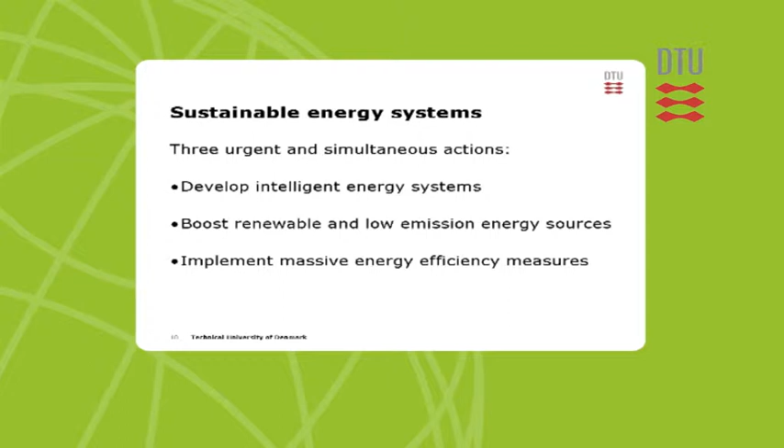Now, the first one, the sustainable energy system, can be done by having three urgent and simultaneous actions. First is to develop the intelligent energy system. That is required in order to take care of a massive amount of renewables, each of which has a different energy profile and supply profile, and also variable supply profiles.

The intelligence of the system is also necessary to harvest the massive potential of energy efficiency in transport and other end-use sectors like buildings. We need smart end-user technology, and in order to harvest the potential, we need a system which interacts two-way with this.

We have another section also concerning adaptation, where we need a new approach to how we manage and plan our society. We see three things to do.

First is to embark on getting reliable climate predictions. They are fundamental, they are a need if we really want to get more sophisticated and useful planning tools.

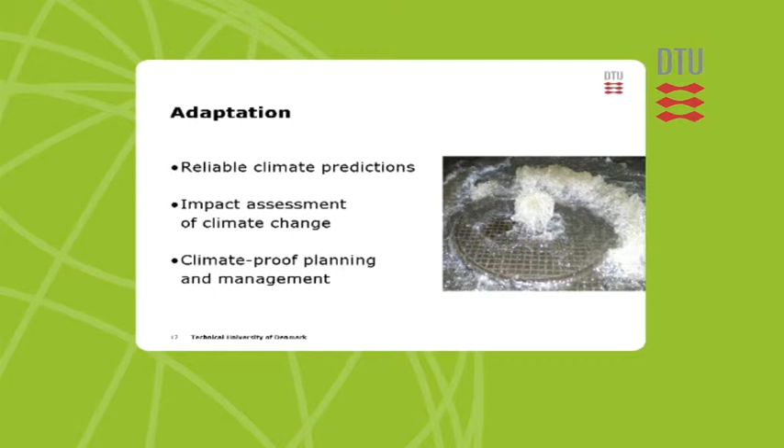Next is climate impact, to study how a changing climate itself, and also the growing population of the world, because climate change is one thing, population growth from 6 billion to 9 billion is another thing which needs to be taken into account. So how will climate changes and other demographic changes impact the natural carbon cycle of the Earth? And finally, develop some tools.

We have a section in the report dealing with what can we do to make this happen, and happen fast.

We give a number of recommendations, all devoted to being more efficient in our work. And our work, that is, of course, from a university point of view, but also from industry and public authorities. A key recommendation is that we need to be much more collaborative.

First of all, it's the same technology we're discussing all over the world, so global partnerships in aligning national research strategies is really something to opt for. Sharing large-scale facilities and sharing tasks in our technology innovation work. Partnerships between the three parties we have been mentioning here.

We often say that public authorities should take some decisions and get things moving, but they'll ask us what kind of decision. So we really need a much more rapid flow of information between these three parties to take informed decisions, not only in the public sector, but also at our level.

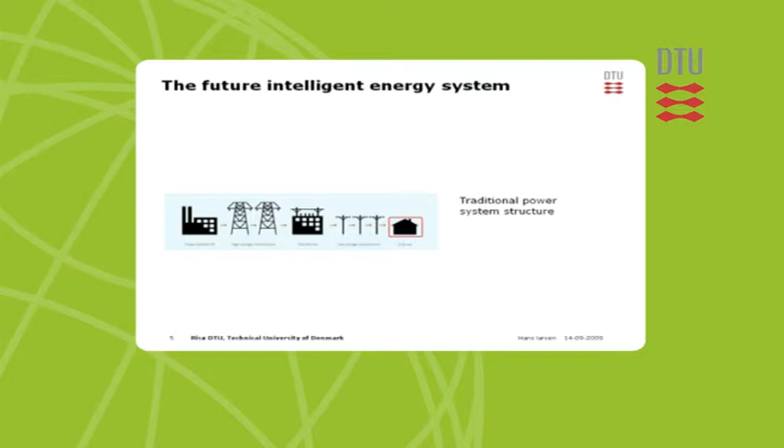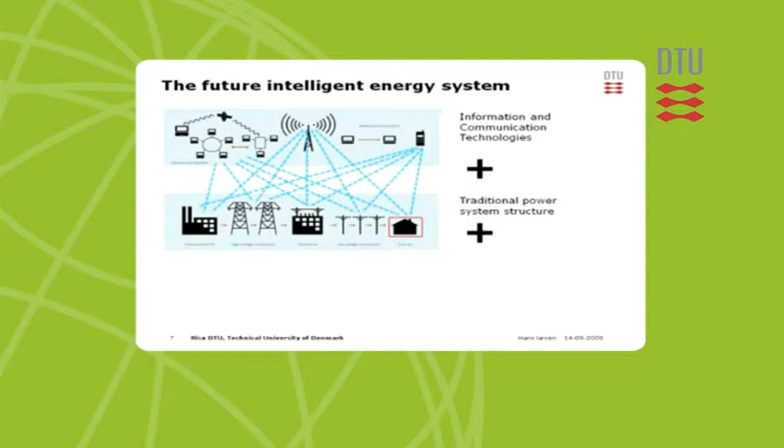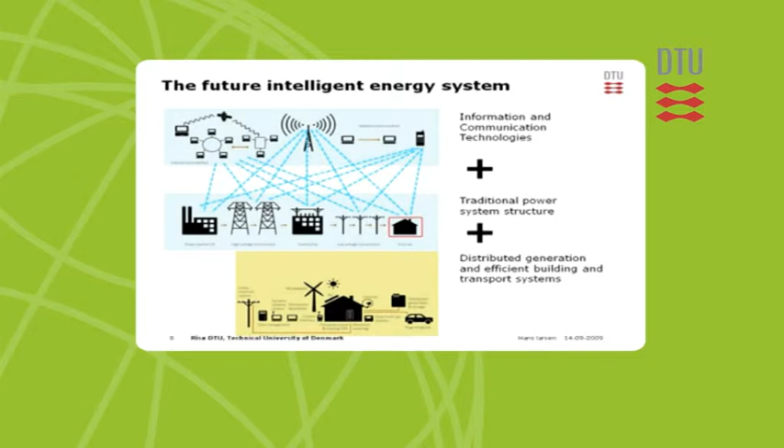What we expect is that in the new system we should make use of information technology and communication technology to a very large extent, and link this with the energy system, adding small local production units and end users in the form of buildings, transport sector, and so forth. If we combine all these things together, we get what we call the future intelligent energy system.

Not everybody knows that fluctuating energy means we need a new grid, because the existing one is a dumb one.

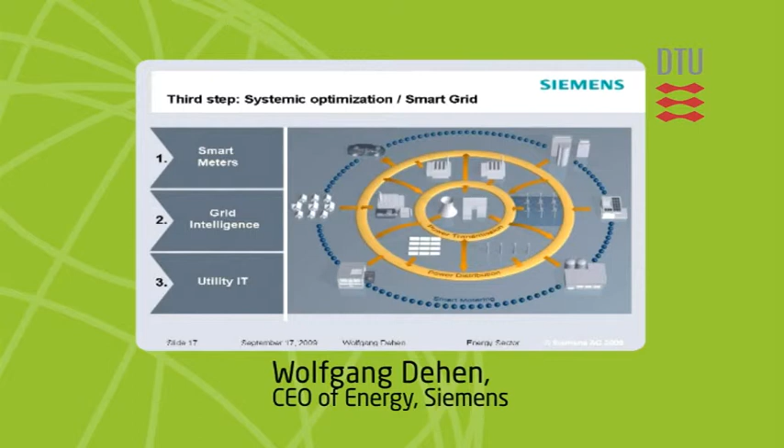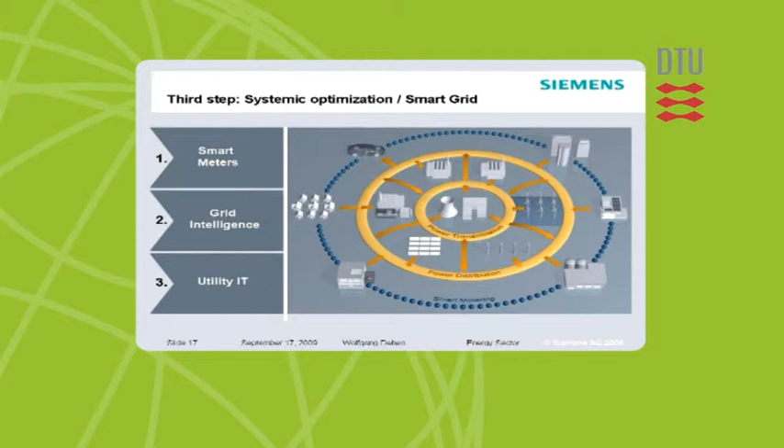What we need is intelligence on top of the existing hardware to make it two-directional and make it sensing and acting. For that you need smart meters, grid intelligence, and on top of it you need to connect the whole thing to the IT of the utilities, so they can really deliver what is expected: a better consumption behavior that really creates efficiency.

There are studies out in the world showing that if consumers know how much they consume in a given moment per day, and they change their behavior towards different consumption, there can be an efficiency improvement of 7%.

But of course, this doesn't work unless we can also deal with the pieces of the grid that will supply all this electricity to those of us who want to use it in a vehicle. You can imagine many more connections on the low voltage side of the grid.

We now need to be able to deal with the intermittencies at all kinds of timescales, from millisecond timescales to day-night to winter-summer. We need to move power over bigger distances, and we need to use sensors and active controls. Right now in the United States, at least, we manage the grid by turning power plants on and off. We need to do better than that.

The comment was already made that real-time measurement, communication, and control is an important part of this, and it needs to be robust and tolerant of failure. And this, at least in the United States, is going to require a totally different market from what we have now.

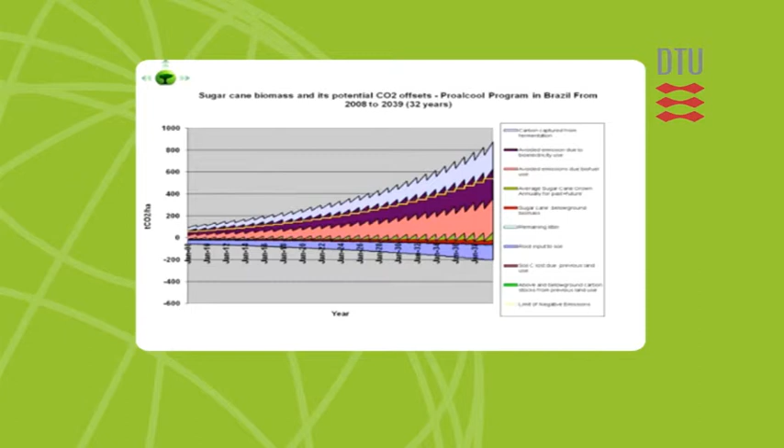We can generate a huge amount of electricity from the same feedstock. And then on top of that, the blue one, the bluish one, is carbon capture and storage. In reality, it's carbon storage, because this is carbon capture and storage from fermentation. And the yellow line that you see shows that if you are above that number, you are doing negative emission.

What we are hoping for, of course, is that the government would use pretty simple objectives so that it's known what does the Danish government, for example, want to achieve with its climate policy. We'd hope that it's as much as possible technology neutral, what it implements.

Of course, this cannot always be the case for timing reasons, for example, as I'll revert to in a little while. And then, of course, for us and other people, for us to invest in research, but much more importantly for our potential customers, to invest in facilities. They need to know that this is a long-term strategy by a government.

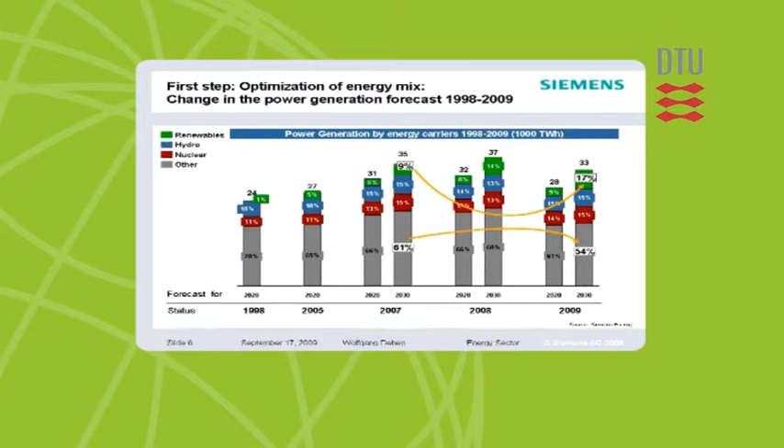The message is, when you look into forecast for, and we always use 2020 and 2030, and status, I think the message here is go to 2007, that column, and then compare 2007 and 2009, always to 2020 and 2030 numbers. You can see that there's a dramatic mix change.

And that, in my point of view, is reflecting, first of all, the target setting, but secondly also that people have realized that we need to move into renewable energy, and you also can see that a significant portion of fossil energy still will be there in 2030.

The general conference opinion was that the use of fossil fuels is needed during the transition period to become a carbon-neutral society.

Hence, the technology to capture and store CO2 needs to be further developed and deployed. This was addressed by several speakers.

The last part of my presentation deals with the carbon capture and storage part. Here, there's a real challenge in that you have to deal with simultaneous development, both of capture processes, transport processes for CO2, and also the storage processes. Different kinds of challenges, but they have to be met simultaneously.

So you have to be sure that there is a market for the processes after the development.

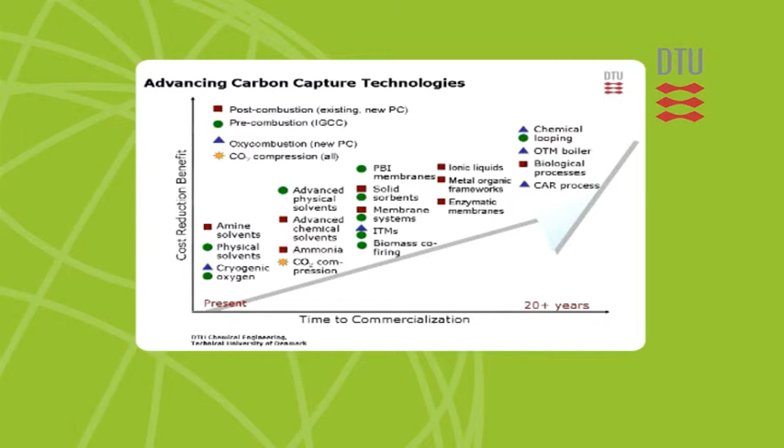For the capture processes, there exist a lot of technologies under development now, the first generation amine processes, and a lot of other processes under development. One of the challenges with the amine processes is that they happen at very low temperature and are very expensive energy-wise. If you can move the capture process and desorption process to a higher temperature level, you may have a much lower specific heat consumption, energy consumption.

Large-scale CCS demonstrations, to get from here to the commercial phase, you do need to have those demonstrations. The amount involved is greater than company balance sheets are likely to be able to justify, especially at a time of reduced liquidity. Only by doing the demonstrations are we going to make that final step from proven technology through to effective operation and unpack those issues around transport, storage, the business model, and so on.

Where policy did more than just say 20% targets, as with this technology thou shalt now produce electricity from coal differently. And that is, as John rightly pointed out, it's in the European Union, but also beyond this, that we should have demonstration plants. Now the European Union has decided, and that's very rare, that the Commission has gotten 5 billion euros, which is a lot of money for us, to do something about energy.

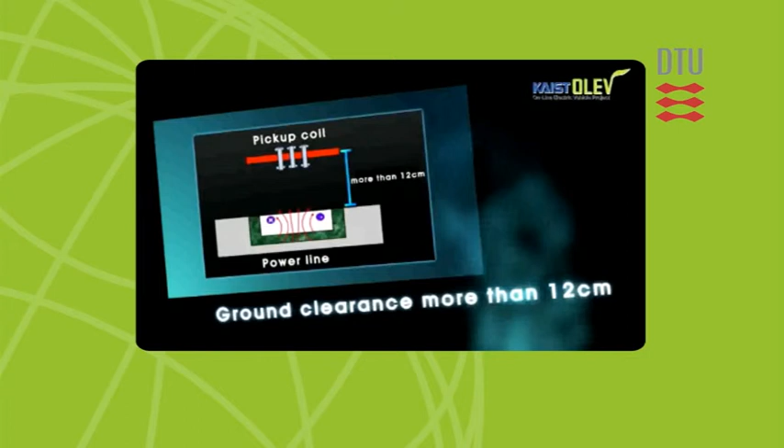Massive energy efficiency measures are a prerequisite to meet the growing energy demand, and to develop a sustainable energy system. The potential, especially within the transport sector, was illustrated.

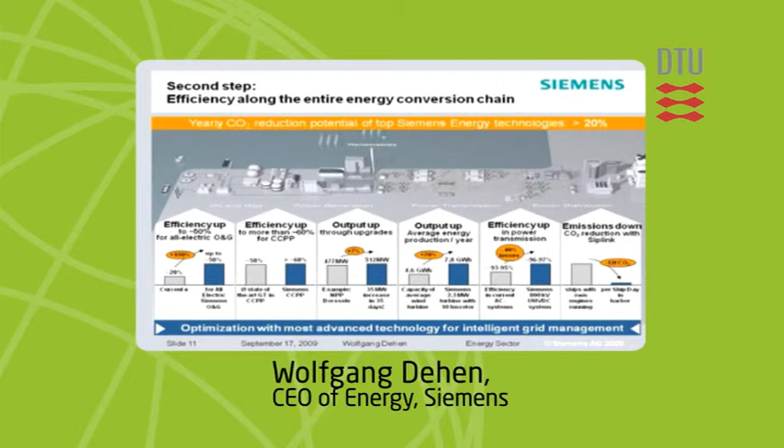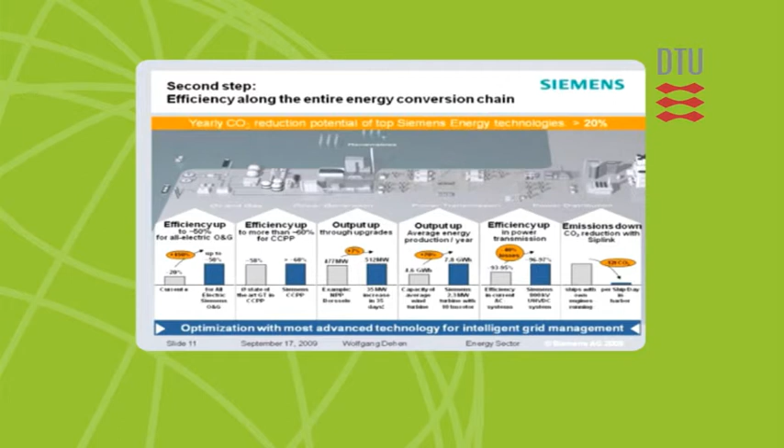So, second step, efficiency, and here you can see again the setup of Siemens Energy: oil and gas, power generation, power transmission, power distribution. I picked a couple of examples of existing technology and the efficiency improvement compared to state-of-the-art or recent technology. I want to pick one, efficiency in the column headed by power generation. A combined cycle power plant, state-of-the-art existing technology, has an efficiency level of 58%, and our technology is approaching 60 and more. That is the product called the H8000, a gas turbine which we have installed in Germany, already out of the test phase.

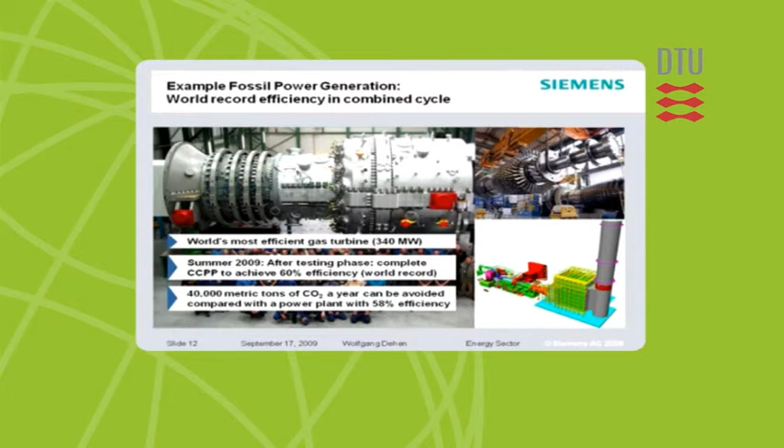So it's proven that we achieve 60% efficiency, and we are now going worldwide on sale with it. Just to give you an idea what the 2 percentage point efficiency increase really means, it's the CO2 emission of 20,000 cars, mid-sized cars, with a mileage of 10,000 kilometers per year.

So that's significant. As already mentioned in the introduction, shipping is by far the most efficient mode of transportation we have today. It's maybe 60 times more efficient than air transport, 5 times more efficient than trucking, but even 2 to 3 times more efficient than rail transportation. So that by itself indicates that at least if we have the alternative, then transport by ship is far more efficient.

That being said, there's no doubt that we in our industry, and Maersk Line as well, do consume and burn a lot of fuel. So it's a huge impact to the global environment. I think the number is that 3 to 4% of the global fuel consumption is actually by shipping. So it's a huge contributor. It's not as huge as for instance road transport or heating, but it's still very, very important.

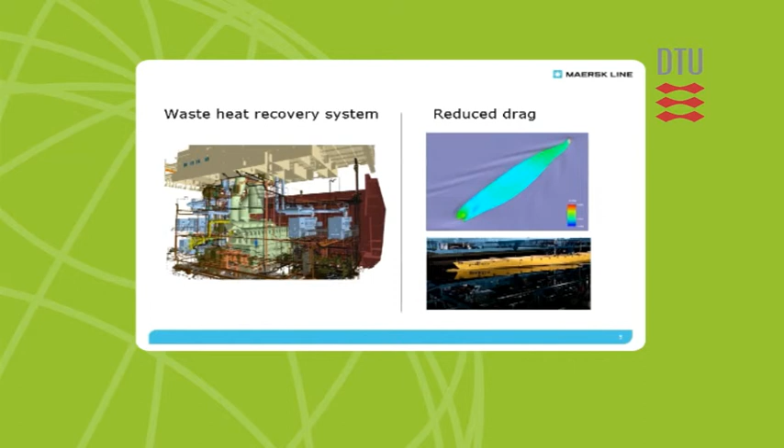So obviously we do a lot to see how we can be more efficient in the way we actually use energy. Here are 2 examples: a waste heat recovery system, basically how we can apply that technology on board our ships, getting a cylinder extra for our propulsion, but also a lot of research going into optimizing the hulls of the ships so we can reduce energy that way. We have at present more than 100 specific projects focusing on how we can reduce our energy consumption.

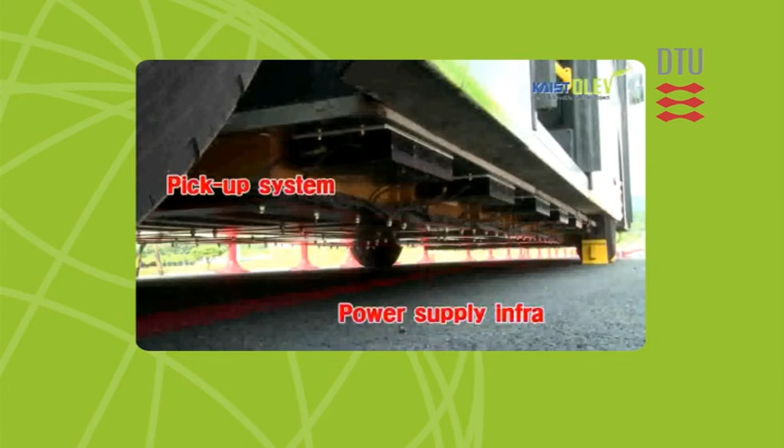So the car we have developed, we are still working on it, but we have demonstrated viability of the concept. We draw electric power from an underground cable. We embed the cable under the ground, about 4 centimeters below the surface, and then we send a magnetic field, pick up the magnetic field, convert that into motive power, and then run the motor. At the same time, we charge the battery if battery power is low.

We also use the battery when you accelerate, so we don't have to depend wholly on the cable. This car has a small battery, and it can go from the house or wherever the person is staying using battery power, because the battery can take these cars maybe 30 kilometers. Once they get on the road that has the embedded electric power cable, it draws power from the ground and doesn't use the battery power anymore.

And so we demonstrated that indeed it works. We built a bus, put the cable in on our campus, and then we have an SUV built this way. As we do more and more research, we continue to increase efficiency. It has been a lot of fun, and interestingly, most engineers think it's not going to work. It's an interesting phenomenon I found, why the technical people are most skeptical. We show them, but still they don't believe it.

I can't resist responding to this challenge. The really big near-term target is energy efficiency. In the United States, we have left ourselves huge room to be more efficient - that's the politest way I can say it. Most of these will be at negative amortized costs, so there's a heck of a lot we can do on that shorter term time scale, even as we work on all the other technology options.